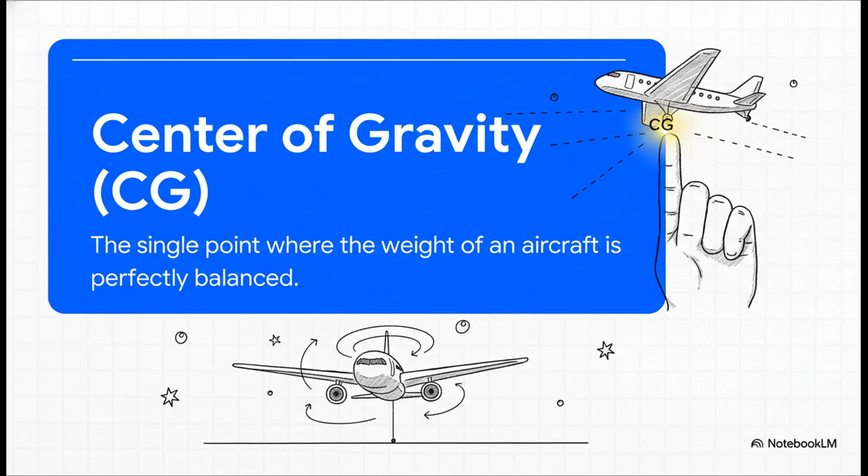Okay, so the center of gravity, it's this single, invisible spot where you can imagine the entire weight of the aircraft is perfectly concentrated. Think about trying to balance a model airplane on the tip of your finger. That one little point where it balances perfectly without tipping over? That's its center of gravity. It is the pivot point for the entire machine.

But here's the catch, and this is absolutely crucial: that point isn't fixed in one place. It's totally dynamic. Every single time a passenger moves or cargo gets loaded, or even as fuel is burned off during a flight, the CG shifts. And that's exactly why pilots have to do a weight and balance calculation before every single flight, just to make sure that CG stays within a very specific, very safe range.

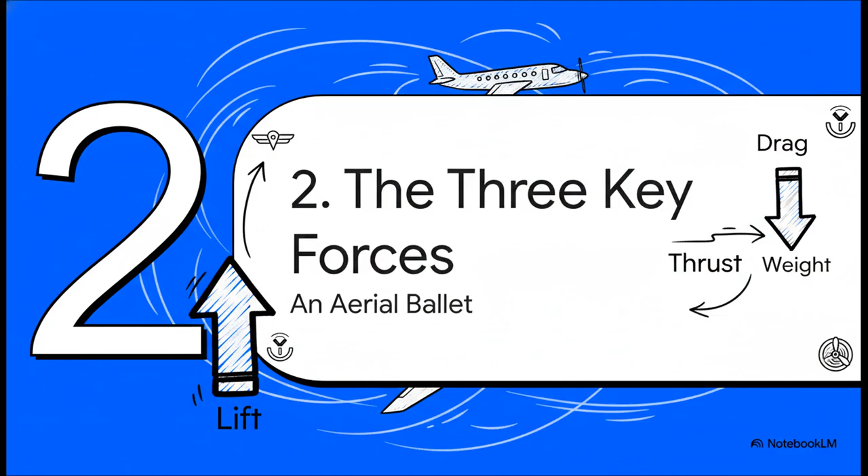So now that we've got our balancing point, we need to understand the forces acting on it. This brings us to the three key forces constantly in this delicate aerial dance. First up, we've got weight. This one's simple - it's just the force of gravity pulling the aircraft down, and it acts straight through that center of gravity point we just talked about.

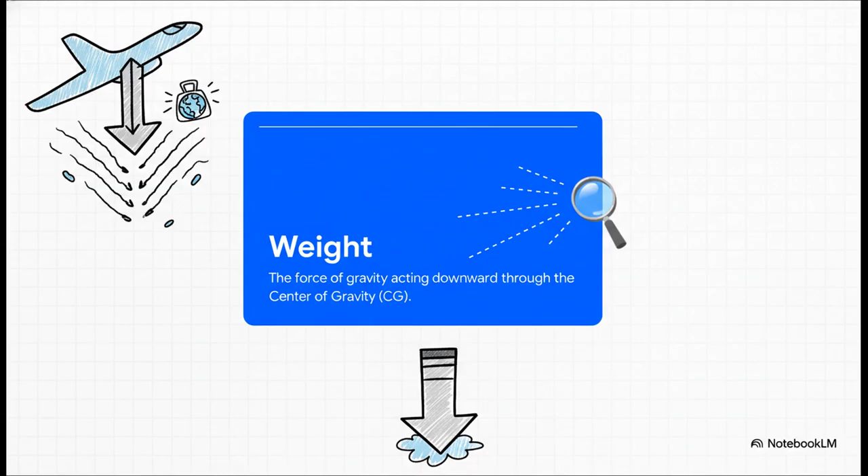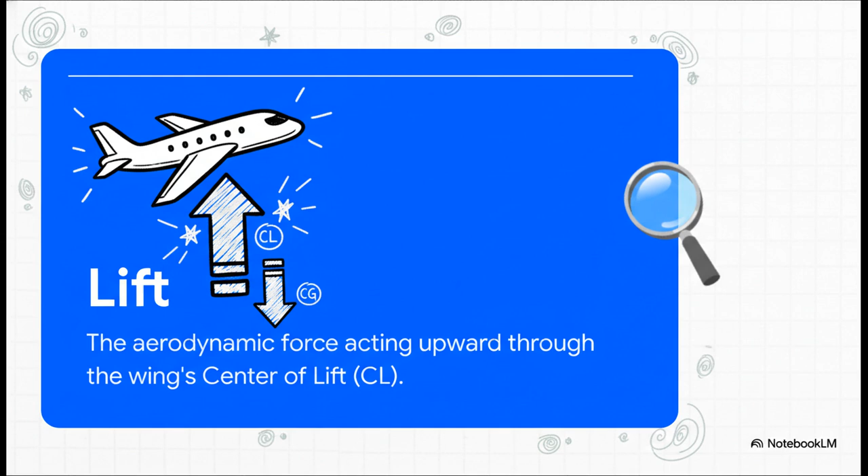Easy enough. Next, we have lift. This is the amazing upward force the wings generate that keeps the whole thing in the air. Now, what's really fascinating here is that lift acts through its own point, called the center of lift. And the key thing to remember is that this is a totally different spot from the center of gravity.

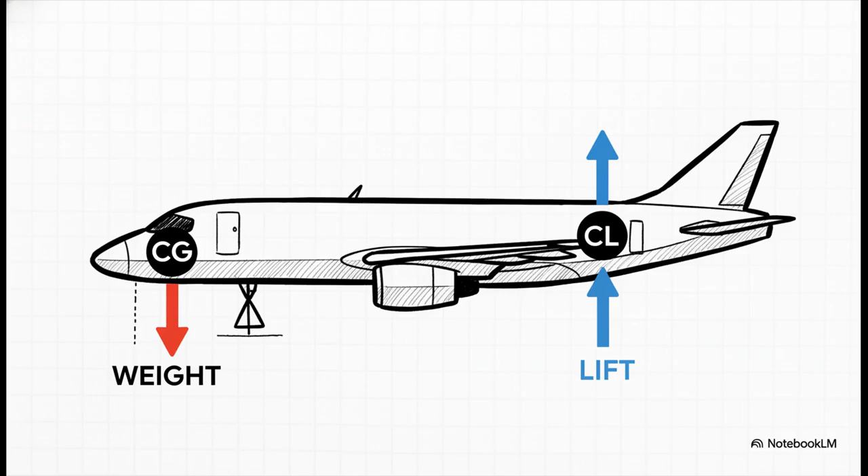This is where you start to see the real genius of aircraft design. In any stable airplane, the designers intentionally place the center of gravity, that pivot point, ahead of the center of lift, which is where the wings are pushing up. So think back to our seesaw for a second. If the pivot point is forward of where you're pushing up, what's going to happen? The nose should constantly want to dip down towards the ground, right?

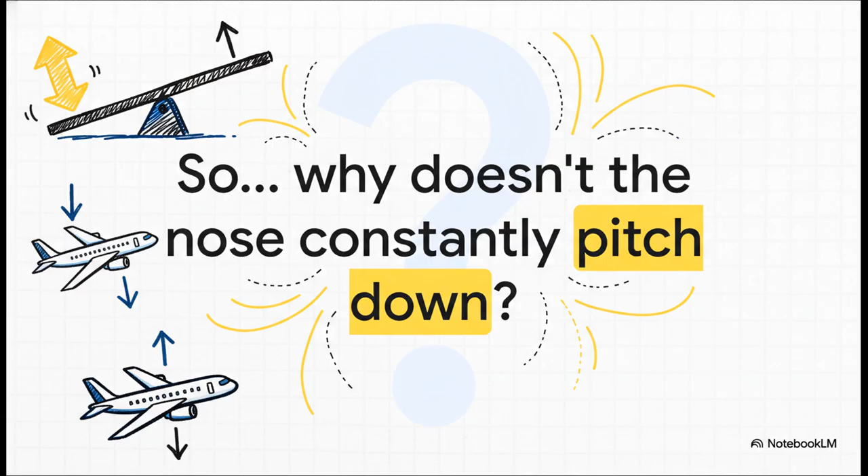So why don't airplanes just nosedive all the time? Well, the answer is our third key force, something called tail downforce. That horizontal stabilizer on the tail, you can think of it as a little upside-down wing. It's actually generating a downward force. It pushes the tail down, which pivots the nose up and perfectly counteracts that nose-heavy tendency. It's the secret ingredient that keeps the whole system in balance.

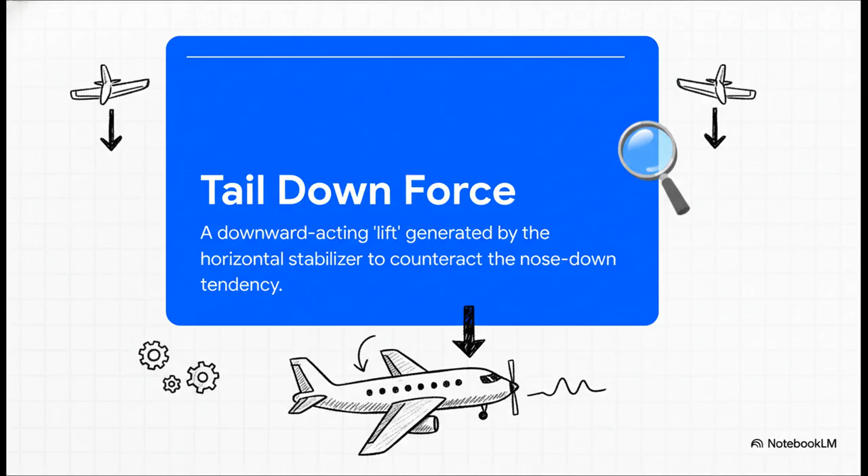And once you understand that third force, it totally changes how you think about the work an airplane's wings are actually doing. So let's look at what we could call the real lift equation. In basic physics class, they teach you that for something to fly straight and level, the upward force has to equal the downward force. So for a plane, that would just be lift equals weight, right? Well, it turns out that's not quite the whole story. Here's the reality.

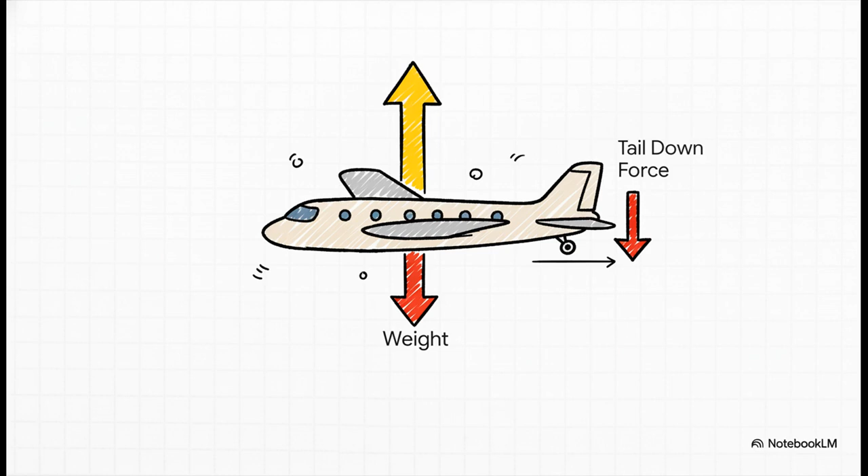The wings have to generate enough lift to overcome two separate downward forces: the total weight of the aircraft plus that tail down force we just talked about. So the wings are actually working way harder than we thought, fighting against both gravity and the force created by its own tail. So here's the takeaway.

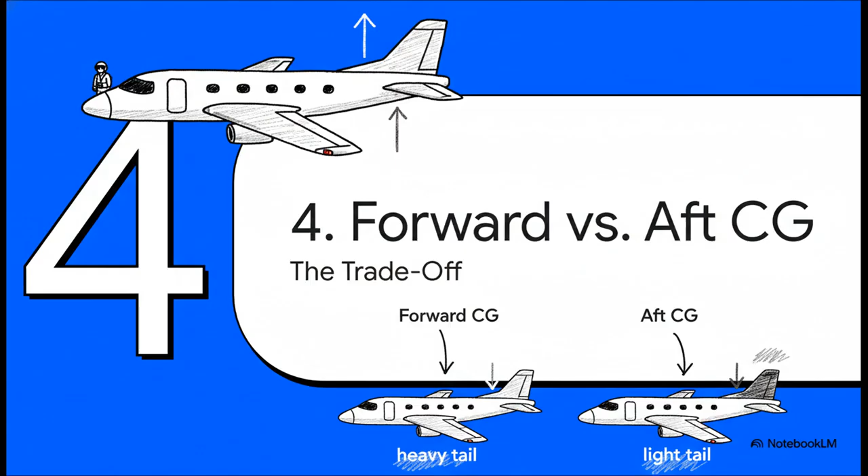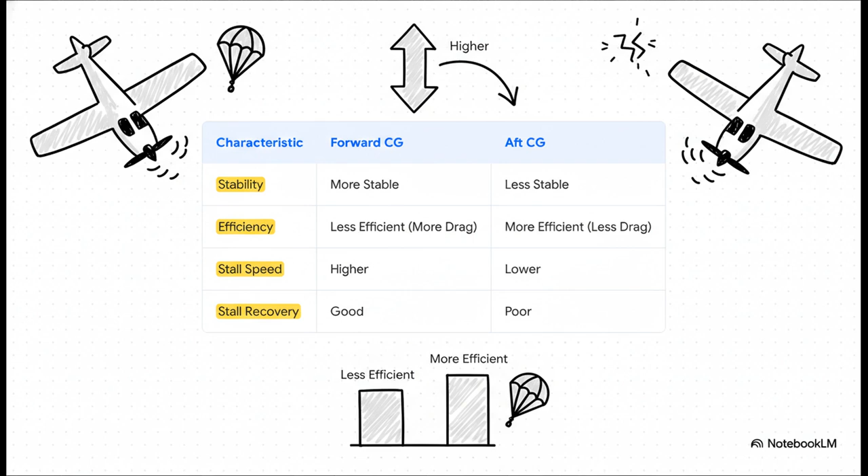Where the pilot decides to load the weight directly impacts how hard the tail, and in turn, the wings, have to work. Let's see how this plays out when we compare a forward CG versus an aft or rearward CG. This table really sums it up perfectly. A forward CG makes the plane more stable, but less efficient. An aft CG, on the other hand, is less stable but more efficient. It also changes the plane's stall speed, and most importantly, how easy it is to recover from a stall. Let's break down why that is.

Okay, so if your center of gravity is way up front, the plane is really nose-heavy. To keep it balanced, the tail has to work overtime, creating a huge amount of downward force. Well, that means the main wings have to create even more upward lift to compensate for both the weight and that big tail downforce. And to do that, you need a higher angle of attack, which creates more drag. More drag means you burn more fuel. It's a whole chain reaction.

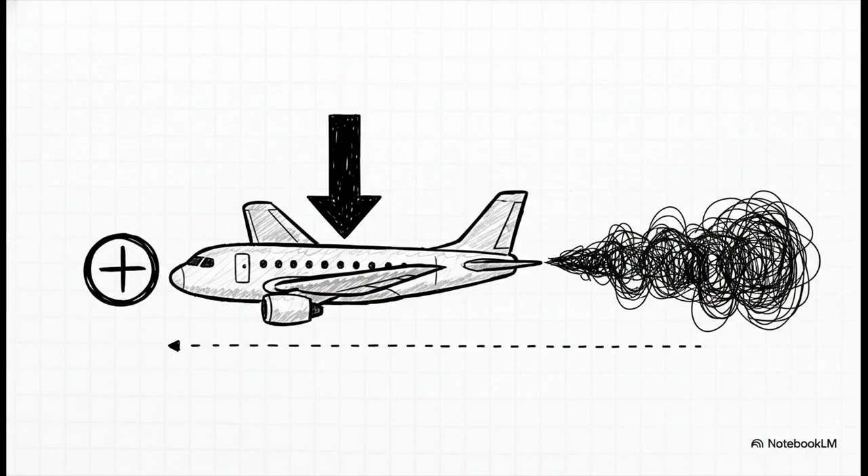Now, on the flip side, if you shift that CG toward the back of the plane, it's a lot less nose-heavy. The tail doesn't have to push down nearly as hard. And that means the wings don't need to generate as much extra lift. This lets the plane fly at a lower angle of attack, which means less drag, and that translates directly to higher cruise speeds and much better fuel efficiency.

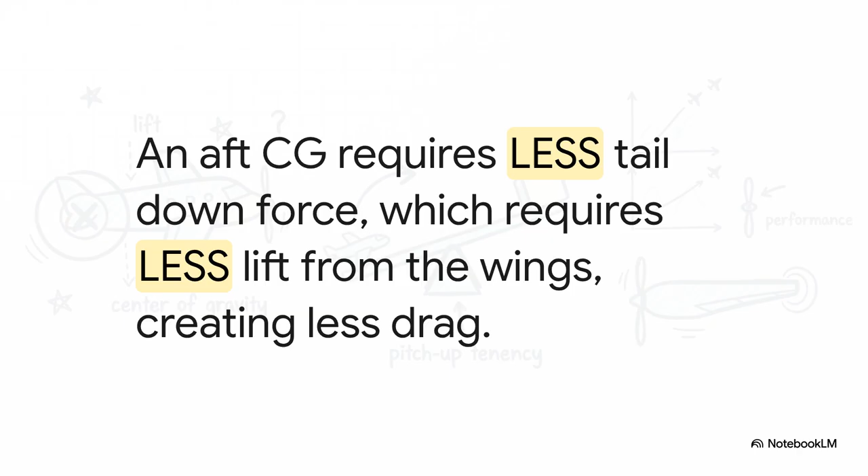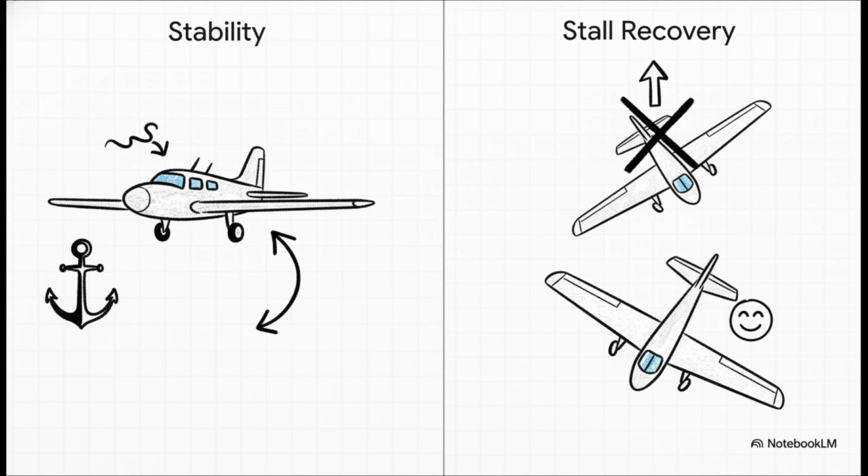And this all sets up the fundamental trade-off that every single pilot has to manage on every single flight: this constant balancing act between stability and performance. A forward CG is the stable, safe choice. Think of it as being, well, nose-heavy and anchored. The plane naturally resists big changes in motion. And here's the best part: if the aircraft stalls and the wings lose lift, that heavy nose becomes a built-in safety feature. It helps the plane automatically pitch down, which lets the pilot regain speed and recover much more easily.

An aft CG is the performance choice. The aircraft is more nimble, more responsive, and way more efficient. That's great for your flight time and your fuel budget. But it definitely comes at a cost. The plane is less stable, and if it stalls, you lose that natural nose-down tendency that helps you recover. It can become incredibly difficult to get back under control.

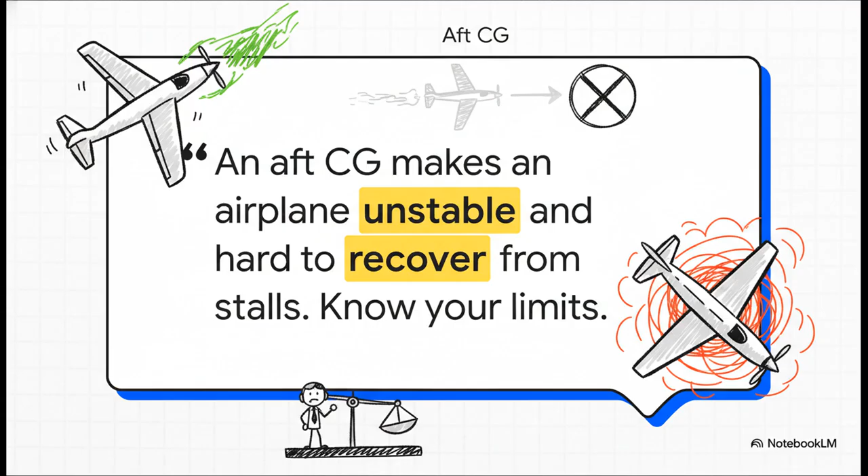And this isn't just some theoretical problem. This quote right here sums up the danger perfectly: flying with the CG too far back is incredibly risky because it can cripple a pilot's ability to recover from a bad situation. You have to know and respect the aircraft's limits, period. And that's really the big thing you should take away from all this. Managing the center of gravity isn't just a homework problem for student pilots. It is a fundamental, non-negotiable part of the pre-flight routine. It directly determines whether a flight is going to be stable, efficient, and above all else, safe.

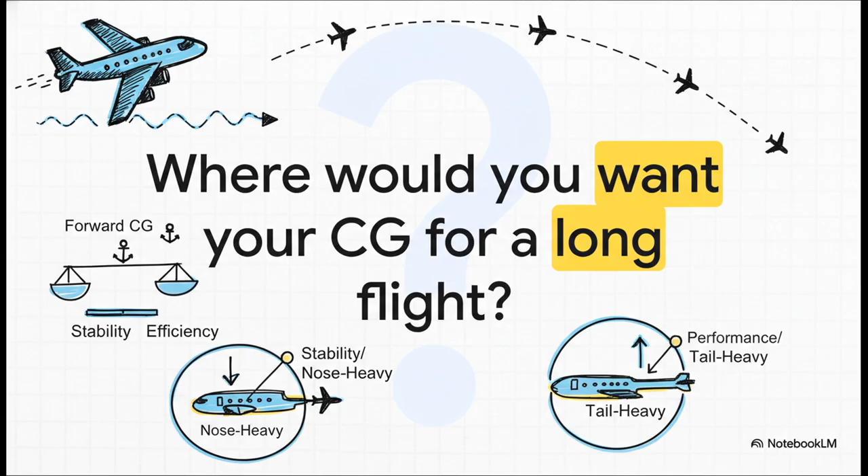So let's wrap this up with a question to put it all together. Now that you know about this constant trade-off between stability and efficiency, if you were the pilot on a long cross-country flight, where would you want your center of gravity to be? Would you load it as far forward as possible for maximum safety, or would you try to get it further back for better performance and fuel burn? It's the kind of decision pilots have to think about every single time they fly.